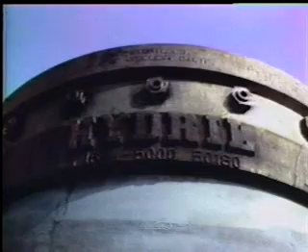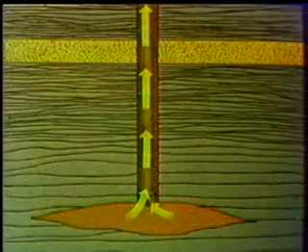The best way to prevent an oil well blowout is to be alert to changes in drilling rate and mud pit level, maintain a good mud program, and avoid swabbing. But abnormal formation pressures can surprise even a careful crew. What is there to back you up in such a case?

The BOP stack. Your life depends on it, so you'd better keep it in good condition. In this program, we'll look at the Hydril Annular BOP and make sure you know how to maintain it. We'll examine two types: the GK, which is simpler and found on many land rigs, and the GL, a little more complicated, well suited for subsea drilling, but also used on some land units.

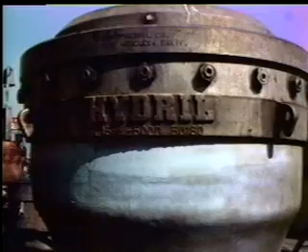Both preventers have two moving parts: a rubber packing unit that performs the sealing function, and a piston. Upward movement of the piston squeezes the packing unit into the bore. The annular preventer will seal off against anything in the bore, drill pipe, tool joints, cable, or Kelly. Or, if you've pulled out, the packing unit can close completely, shutting off the entire hole.

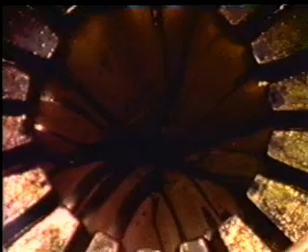Complete shutoff of the annular BOP on an open bore should only be performed in the event that your blind rams fail or can't be used. The annular also allows stripping, so you can run the drill string back into the hole under kick conditions.

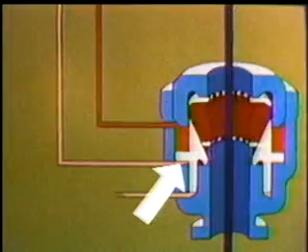The annular's hydraulic operating fluid is light petroleum hydraulic oil or a mixture of water and water-soluble oil. Closing pressure will be applied here at the closing chamber. When we apply closing pressure, the hydraulic fluid forces the piston upward. Pressure applied to the opening chamber pushes the piston down, allowing the packing unit to return to its normally open position.

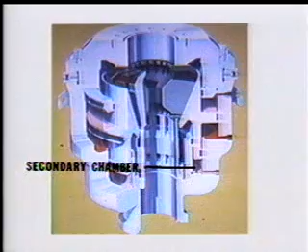In addition to the opening and closing chambers, which you'll find on a GK-type BOP, the GL BOP has another chamber. It's called a secondary or balancing chamber, and it can be used in one of three ways. The standard hookup is shown here: the opening chamber is connected to the secondary chamber. The advantage of this standard hookup is that it requires the least volume of control fluid.

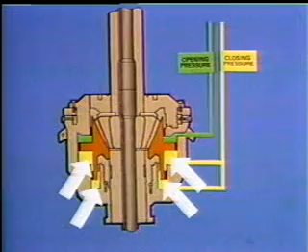An optional hookup connects the secondary chamber to the closing chamber. Closing pressure is now exerted here and here. This reduces the closing pressure required by nearly a third. Now it takes less pressure to close the preventer, but it does take more fluid, so it's a little slower.

If you're drilling in deep water, the GL can also be connected in a third way. In this hookup, the secondary chamber is connected through an interface accumulator to the marine riser. This is called a counterbalance hookup.

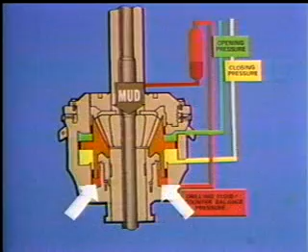In deep subsea applications, the weight of the column of mud in the marine riser exerts a significant downward or opening force on the packing unit and piston. In a counterbalance hookup, the pressure of the mud is also applied here at the secondary chamber, where its closing pressure offsets the opening pressure of the mud.

The pressure on the packing unit and piston is now balanced, giving you efficient control of the BOP using normal closing and opening pressures. With this hookup, you won't have to adjust your closing pressure regardless of the water depth of your stack.

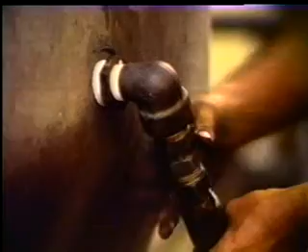It's very important that you always hook up all three chambers on the GL BOP. The GL won't operate correctly if you leave the secondary chamber plugged or exposed to seawater.

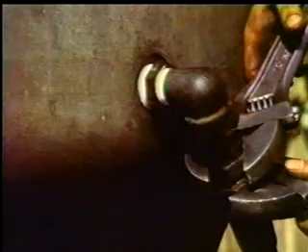Now let's open up a GL preventer and see what's inside. Before you disassemble a preventer, open the control system valves and loosen the hydraulic connections to the BOP to allow any trapped pressure to leak out. This is a safety precaution to keep you from getting hurt.

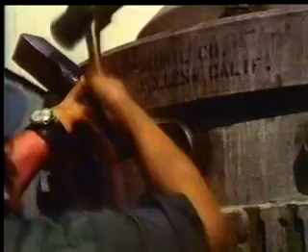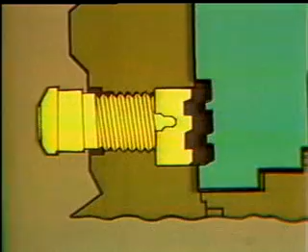To release the head, back the jaw operating screws out about 4 turns. Back with the wrench all the way so we can count the turns. Keep on going. The screws operate these jaws inside the preventer. The jaws have to be retracted in order to remove the head. You should be able to feel the jaw's shoulder against the body. Don't force them. Remember, it's about 4 turns.

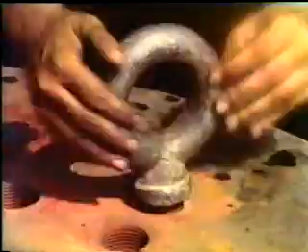Excellent. Now, take out all the pull-down bolts on top of the head. Unload the head evenly by loosening one side, then the opposite side, rather than going around the preventer. Install 3 eye bolts, a triple chain sling.

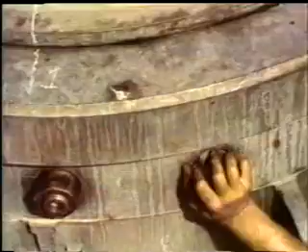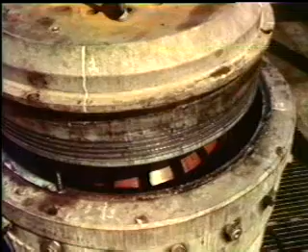Lift the head slowly so you don't catch it or bang it on other preventer parts. Move the crane that way if you can now. That's the head. Next is the packing unit. It'll lift right out with the help of a couple of eye bolts.

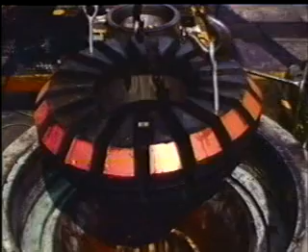Install 3 eye bolts in the opening chamber head. Lift it carefully with the triple chain sling.

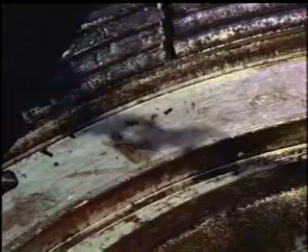You may have to tap it with a soft head hammer or shake the sling to get it loose. The trick is to keep it level so it won't bind.

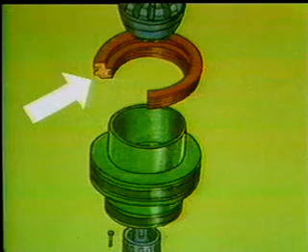That's the opening chamber head. Next is the piston. Install 2 eye bolts. The wall of the piston is a critical sealing surface, so it needs to be protected. Put a couple of wooden spacer blocks between the eye bolts and the wall so you won't damage it. Once again, lift carefully.

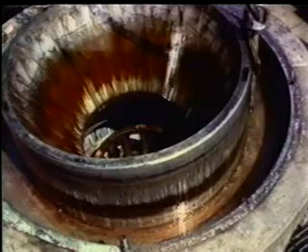Now unscrew the cap screws around the slotted body sleeve. It's not easy, but there are some critical sealing surfaces and seal rings down there that you need to check. Hook a sling in the slots of the sleeve to lift it out.

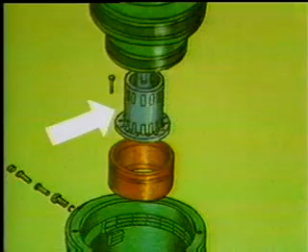That's the slotted body sleeve. Now, the outer body sleeve. It'll lift right out.

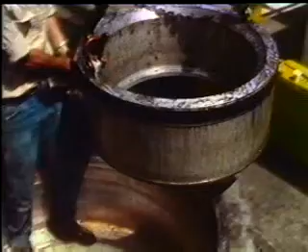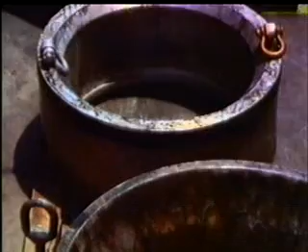That's the complete preventer. The body, the packing unit, slotted sleeve, the head, the outer body sleeve, piston, and the opening chamber head. If you have a GK type of preventer in your stack, you'll find it's like the GL but with fewer parts.

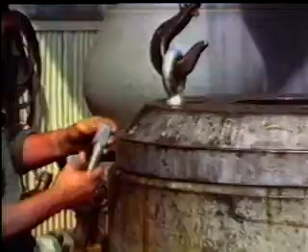First, remove the locking screw. The GK head will unscrew. The internal parts of this BOP include the packing unit and piston.

The annular preventer is pretty simple, and it doesn't need a lot of complicated maintenance. It's awfully important, though, so give careful attention to the things it does need. Routine cleaning and inspection, packing unit testing, packing unit replacement, and seal replacement.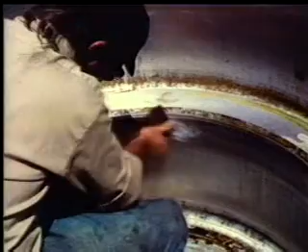Once you've disassembled a unit, check the inside walls of the body. Repair minor pits and scores with emery cloth. If there are bad pits or scores, machining or welding is probably needed, and that's a shop job.

Inspect the body sleeves for damage or wear. Look at the piston for pits or scores, and check the bowl of the piston for pits or gouges. Smooth any rough areas with emery cloth, a file, or a grinder if necessary.

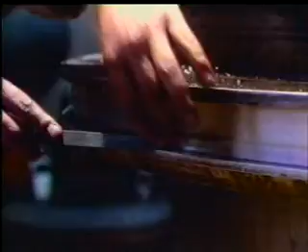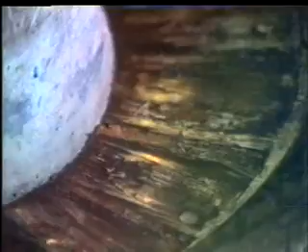The bottom of the head may have grooves caused by wear from the steel segments of the packing unit. If you think they're excessive, ask your tool pusher to take a look. If it needs repair, it'll have to go to the machine shop for welding, machining, and stress relieving.

There are several sets of seal rings in your preventer that serve to isolate the various operating chambers from each other and from the annulus.

On the GL, these sets of rings seal off the secondary chamber. This set forms a seal between the opening and closing chamber. And these two seal off the opening chamber.

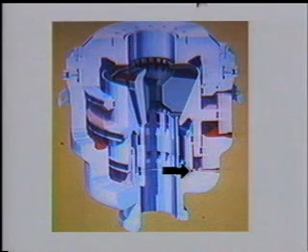There's also an O-ring on the preventer head, and one between the outer body sleeve and the body. A GK type preventer has fewer rings on the piston and on the head, plus the head gasket.

Check every seal ring for nicks, cuts, fraying, or abrasion. If a ring looks bad, get rid of it. It's a small price to pay for your safety.

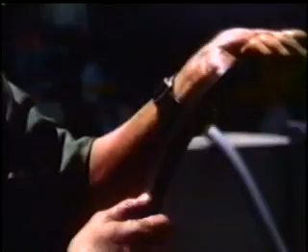The GL and large GK preventers have some individual seal rings and some that require backup rings on either side. Pay attention to what you take off so you'll know what to put back on.

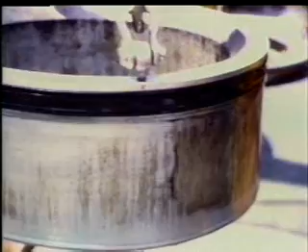Inside the preventer body, where it mates to the body sleeve, an O-ring. On the outer body sleeve, a U-seal ring and two backup rings. On the piston, a U-seal ring and two backup rings.

Another U-seal ring with backup rings. On the opening chamber head, a U-seal ring inside and a gasket on the outside. And on the preventer head, an O-ring and a U-seal ring.

Be sure to read the Hydril operator's manual and point the sealing lip of the ring in the right direction, in this case, up. Coat the new rings with silicone grease or castor oil. A petroleum-based grease or oil would shorten the life of the seals.

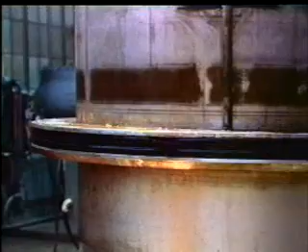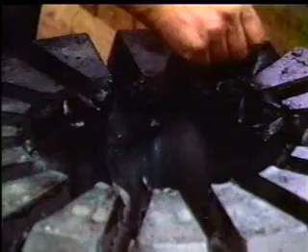The packing unit is synthetic or natural rubber, molded around a ring of individual steel inserts. We've exposed one insert here to show you. You really can't tell much about a packing unit just by looking. This one looks torn up, but it may perform its job perfectly well. The only way to be sure a packing unit is bad or still good is to perform a test closure of the BOP. This is covered in the operator's manual and later in this program.

Hydril makes 3 types of packing units. For use with oil base or oil additive mud, there's a synthetic rubber packing unit. This should be used only at operating temperatures above 20 degrees Fahrenheit. This type of packing unit is identified by a red band. No color band indicates a natural rubber packing unit designed for drilling with water-based mud. The green band signifies a neoprene rubber packing unit. This is for use with oil-based mud at low temperatures.

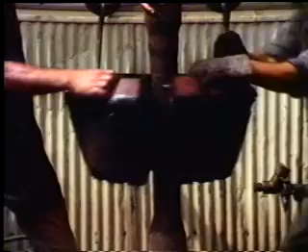You've probably heard that you can replace a packing unit while there's pipe in the stack simply by cutting through it and slipping it around the pipe. You can, but there's an easy way and a hard way.

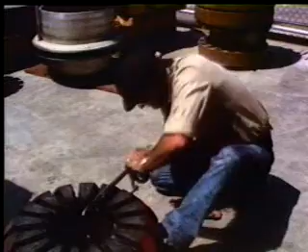On the left, Steve is huffing and puffing. He's doing it all wrong. You look like you could use some Gatorade. He's using a saw instead of a knife. He isn't lubricating the rubber, and he isn't keeping tension on it.

Mario, on the other hand, seems to be having a good time. He's using a knife, oiling the rubber with castor oil, and prying between two of the steel inserts to keep tension on the rubber. Okay, go back and keep cutting.

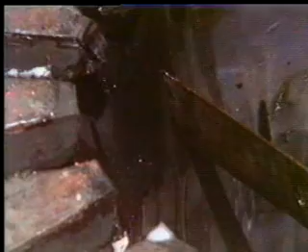Go like this. Hold it. Hold it. Hold it. It took Mario about a minute. Steve's going to be at it all day.

A common method of keeping tension on the packing unit you're removing is to tie a couple of ropes around it and pull from opposite directions. Never use a saw on a new packing unit. It'll tear the rubber, ruining the packing unit.

Before we assemble our GL preventer, let's look at one more maintenance procedure you may run into. These latching jaws are replaceable in case they get damaged. Pull the plug from the jaw operating screw. Remove the sleeve screw and spacer sleeve.

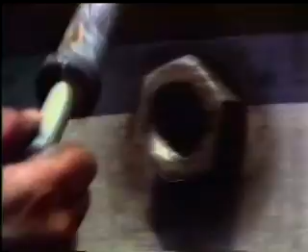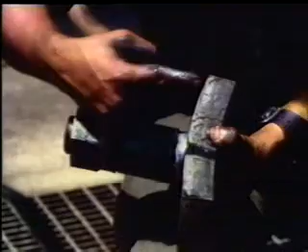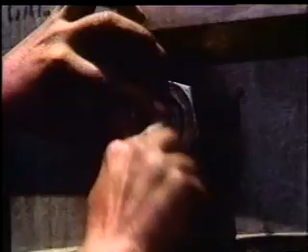Now, the jaw is loose and can be removed from inside the body. The sleeve screw holds the jaw to the operating screw, so that turning the operating screw moves the jaw in or out. To install a jaw, place it in position, screw the operating screw in hand tight. Now install the spacer sleeve and sleeve screw and tighten it to about 90 foot-pounds.

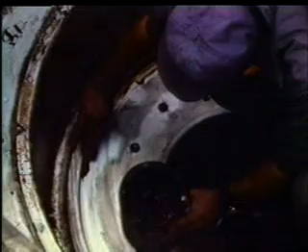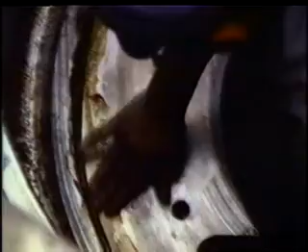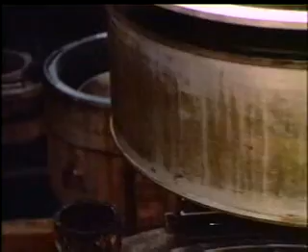We're ready for reassembly of the GL. First the O-ring and a little silicone grease. Now lubricate the outer body sleeve. And lower it into the preventer.

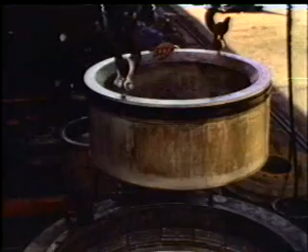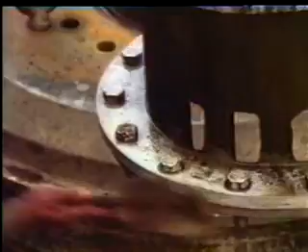Be sure to remove all eye bolts. Lubricate the slotted sleeve. Clean the cap screws. And you'll find it a big help to use some zinc-based pipe dope on the threads.

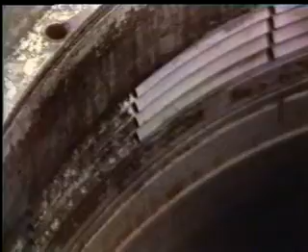Look at that jaw on the left. It should look like the one on the right. Do a little more scrubbing in there if you didn't catch it the first time. Some pipe dope on the jaws will keep them from binding next time you have to take the preventer apart. Don't put any dope below the jaws.

Lubricate all the mating surfaces of the piston. Remember to use a silicone-based lubricant or castor oil. Now, carefully lower the piston into the body. Line it up carefully. Watch for pinching of the seals.

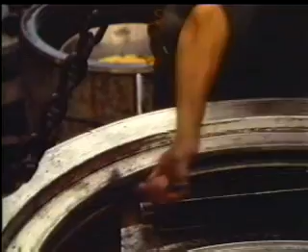Next is the opening chamber head. It may not seat completely into place. The preventer head will force it into place if you have it aligned correctly. Be sure to lubricate the piston bowl before you lower the packing unit into place.

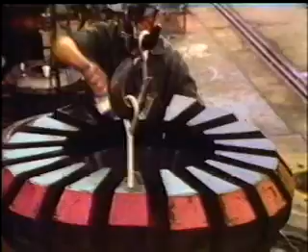Make sure you've gotten all the eye bolts.

Now apply some lubricant on the head and pipe dope on the locking rings. Lower the head and pull it down with the four pull-down bolts. There shouldn't be more than 50 thousandths of an inch clearance between the BOP head and body. That's too much.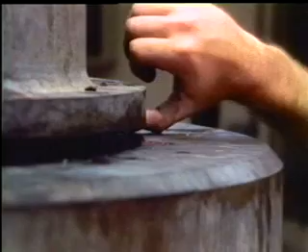If you try to engage the jaws now, they won't mesh, giving you the false impression that the head is on tight. That's better. Now rotate the jaw operating screws clockwise to engage the jaws. If they don't rotate four turns, the jaws aren't meshing. Apply 300 to 400 foot-pounds of torque.

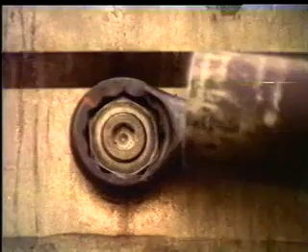Don't forget now to retighten the hydraulic fittings.

You should disassemble your BOP at the conclusion of each well. Inspect it, clean it, and lubricate it. Replace seals if necessary and make any repairs needed.

Occasional test closures of the preventer will enable you to check the packing unit. Only through test closures can you be sure your BOP can seal off a hole under pressure. You should perform a surface test between wells and whenever you replace a packing unit. On land operations, this thorough test can be done every time you test close the BOP.

The standard offshore procedure is to clamp the stack on the test stump and fill it with water. Make your test closures on the recommended size test pipe.

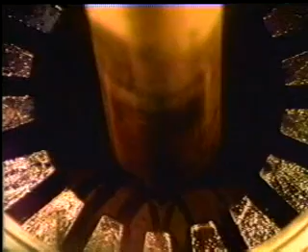Before you close the preventer, insert a piece of welding rod into the test hole in the head. The rod will rest on the piston. When the piston moves, the rod will move. Mark on the rod at the top of the head.

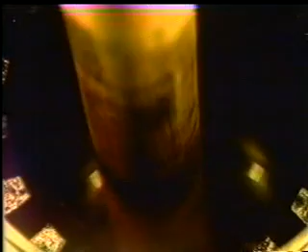Now close the preventer. Pressure up through the test stump to the test pressure you've been instructed to use. Use just enough closing pressure on the preventer to seal off the simulated downhole pressure. If you can't get seal off, you immediately know something's wrong.

Even if you do get seal off, mark the rod again at the preventer head. The distance between the marks is the measurement of the piston stroke.

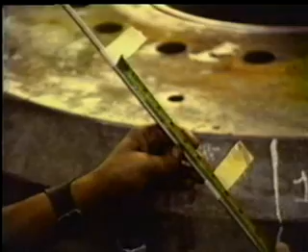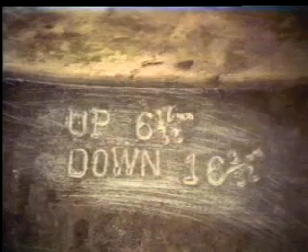Determine the maximum piston stroke by looking in the operator's manual or at the measurements stamped on the head. These give you the maximum distance from the top of the head to the top of the piston with the preventer open, and the minimum distance from the top of the head to the top of the piston with the preventer closed at full stroke.

Obviously, if you take the difference, you'll have the very longest piston stroke possible. Your piston stroke won't be this long, because a good packing unit will seal off before the piston reaches its upper limit. Compare the measurement of your piston stroke with the maximum stroke.

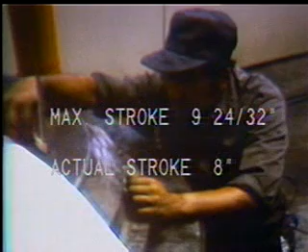As your packing unit wears, these figures will get closer and closer. When your actual piston stroke approaches the maximum possible stroke, you'll need to replace the packing unit because you need a margin of safety, and it may take more piston stroke next time you close the preventer. How much safety margin you require will be determined by your tool pusher.

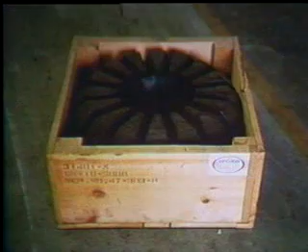Store spare packing units and seal rings in a relaxed position, preferably in the box. Keep them in a cool, dark, dry area away from electrical machinery or other areas of ozone concentration, so they'll be in good condition when you need them.

Now you've seen how simple the Annular BOP is. Can you remember the basic maintenance practices? How do you check the packing unit for wear or fatigue? By making routine test closures and measuring the stroke of the piston.

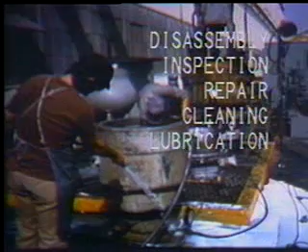What should you do with the BOP after completing a well? Disassemble it, inspect it, repair, clean, and lubricate it.

What should you inspect? Examine each part, looking for nicks, burrs, or scores in the sealing surfaces. Inspect the seal rings for cuts or tearing.

How do you repair it? Usually emery cloth or a file will handle the problem. Any serious damage should be referred to the tool pusher, because the unit may need to go into the shop.

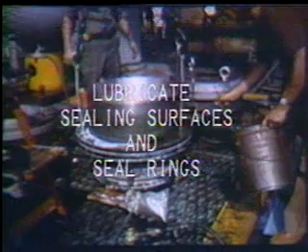What should be lubricated? All the sealing surfaces of the parts, as well as the seal rings, should be lubricated with a silicone-based grease or castor oil. Petroleum products will damage the seal rings. Replace any damaged seals and replace the packing unit if it doesn't test out.

It's that easy. And the BOP is so vital to your safety, there's absolutely no excuse for you to neglect it. Whenever you're in doubt about a procedure, use the operator's manual. The manual spells it all out. Treat your blowout preventer like your life depends on it. It does.